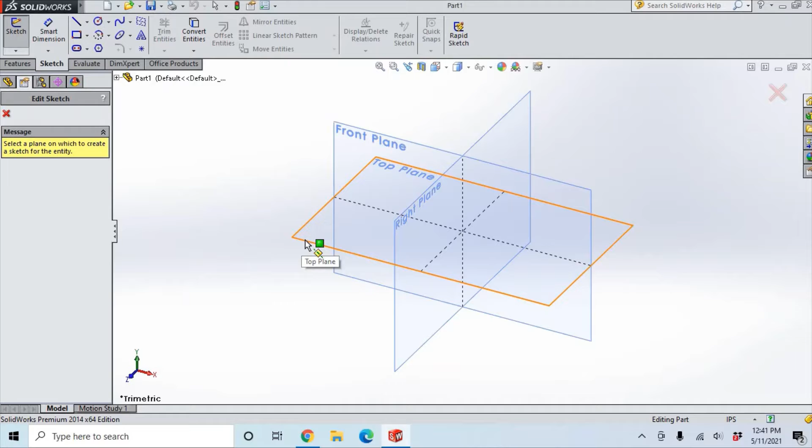So in order to begin our part, we need to do a sketch. We're gonna click on the sketch toolbar, and commands pop up. We're gonna click on the sketch command highlighted to the left, click sketch, and then click on the top plane. Now SolidWorks orients to top view so you can see it flat, and you can start creating your parts in a flat fashion.

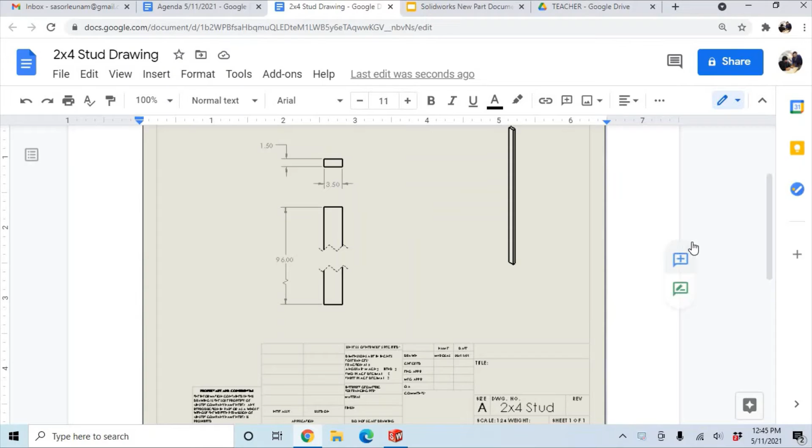All right, so let's look at the drawing that we're going to be making today. This is the 2x4 stud drawing, and our part says it's 1.5 inches by 3.5 inches. Even though it's called a 2x4, meaning 2 inches by 4 inches, in reality it's 1.5 inches by 3.5 inches, and we're gonna make this wood stud 96 inches long, or 8 feet long, which is equivalent to 96 inches. So this is the cross section we are going to create, and then we are going to extrude it.

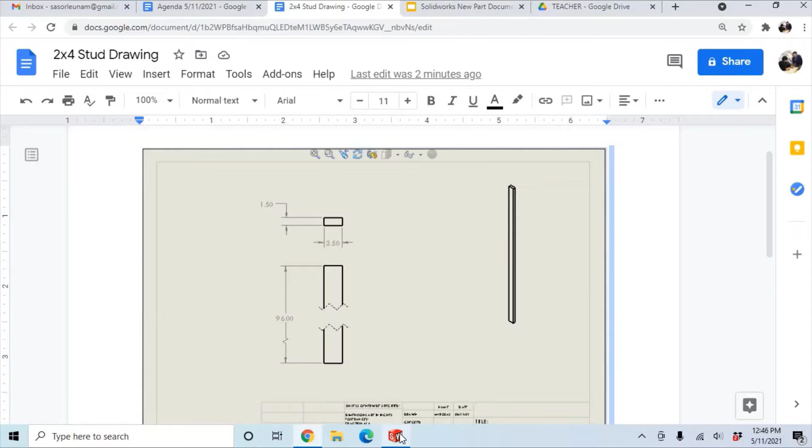So let's go back to our SolidWorks. Like I said before, we're going to start with a sketch. I am already inside the sketch, so I'm going to create a rectangle to create that profile. First I'm going to click on a point vertically from the origin, and then I'm going to click another point that is horizontally from the origin. For a sketch, it doesn't have to be precise, as long as this corner here is located on the origin.

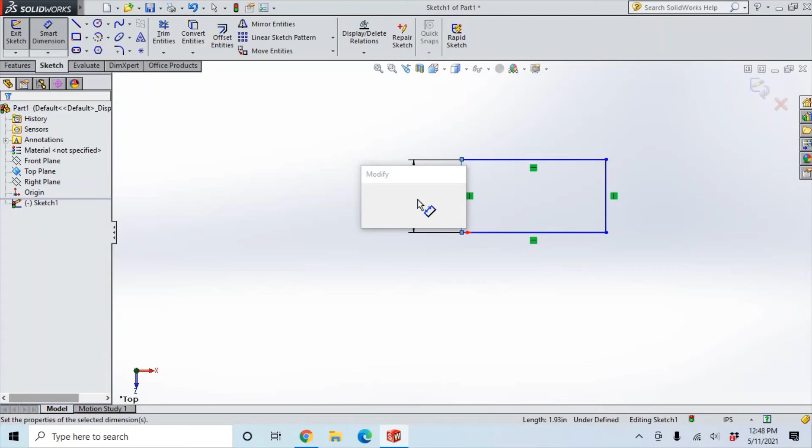Now we are going to add dimensions to this. We're going to go to smart dimension and dimension this, and we said the height of this cross section is 1.5 inches. So I'm going to overwrite this, and I am going to do the same with the horizontal version.

Now I am going to make sure my left corner of my rectangle is right on the origin. Notice that before it was a blue rectangle, meaning I could have moved it, which I was able to drag. So when I dragged it from that corner, I actually was able to pin it to the origin. That way, I am no longer able to drag it. This is important because once we start more advanced modeling and start assembling items, we don't want these sketches to be moving around - it will create many complications.

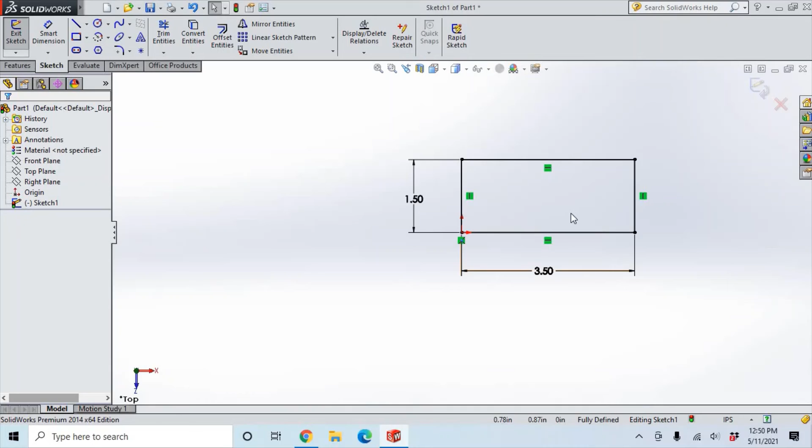So before we close this sketch and finish it, we need to make sure that it's fully constrained. Fully constrained means that the sketch is fully dimensioned and all of the objects in the sketch are turned black instead of blue. Now that we are fully constrained in our sketch, we can complete it, and then we're ready to create this 2D sketch into a 3D object.

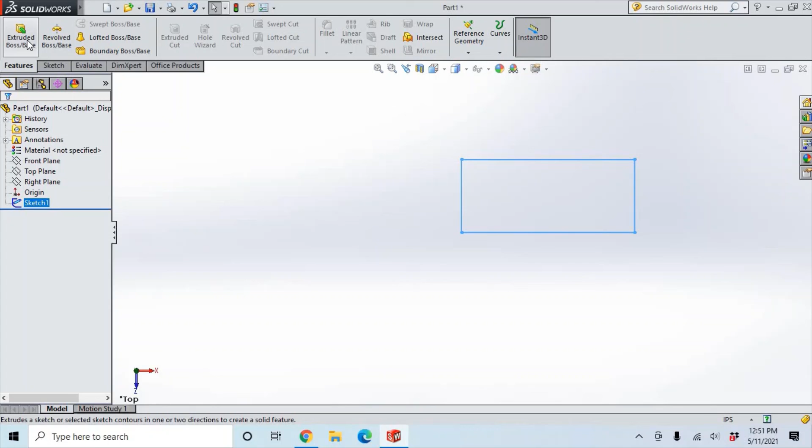So now we're going to move to the features toolbar. This is our sketch toolbar, and this is our features toolbar. In our features toolbar, we are able to turn these 2D sketches into 3D by means of two different ways, and we're going to use the Extrude Boss. So we click on the Extrude Boss, and it rotates this image.

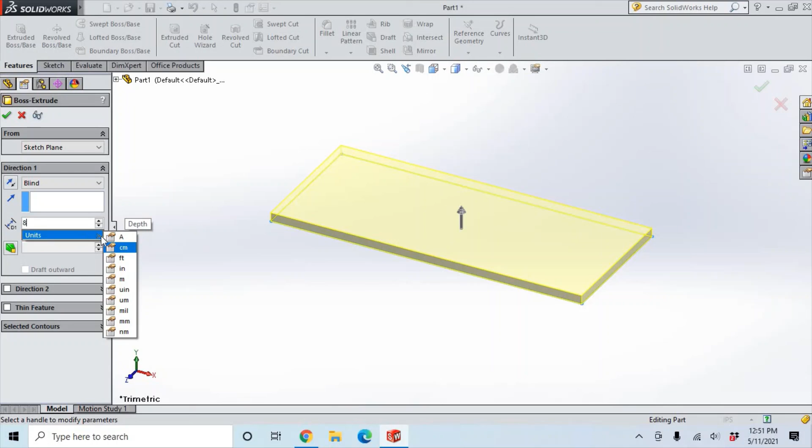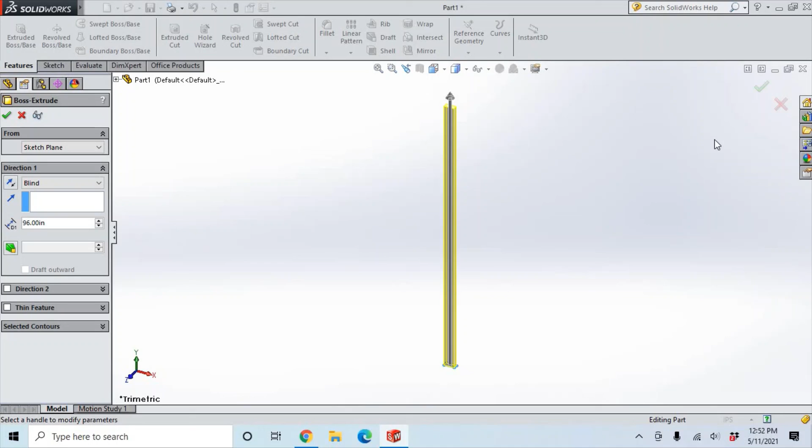We are going to overwrite this. I can't remember the inches, but I know it's 8 feet, so I'm going to overwrite this and say 8. Over here on the unit side, I can drag and click feet - once you erase the default units, it will give you the units option. So I'm going to do 8 feet, enter. And once you enter, it actually creates this 3D object. So this is our Extrude Boss. Now I can complete this - if I'm satisfied with my extrusion, I can complete it. And this is how we create 3D objects in SolidWorks.